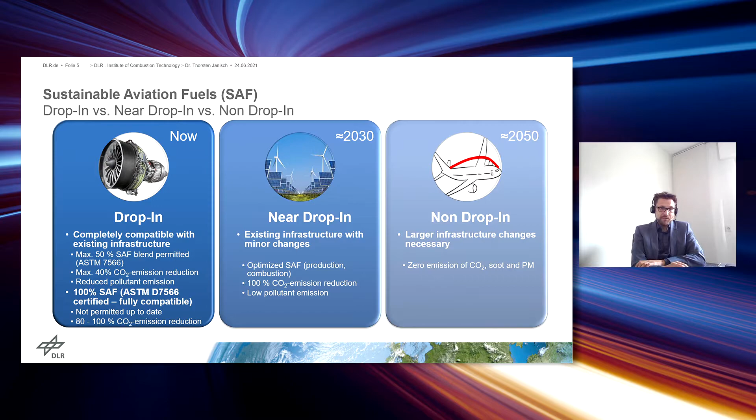Probably the fuel cell and electric aviation, due to the long development cycles, will make its way into this world only from 2050 onward. When it comes to the near drop-ins, we may expect them to set in at 2030, but we have no more than 7 years to go. We have to take action now, and that's why we become active. We actually develop drop-in fuels, and we do research on them.

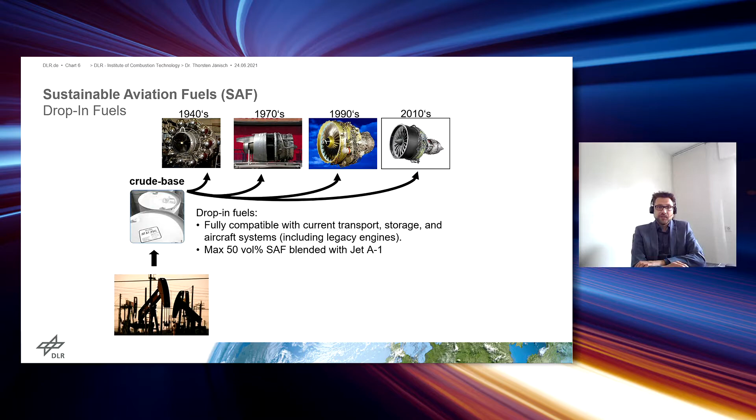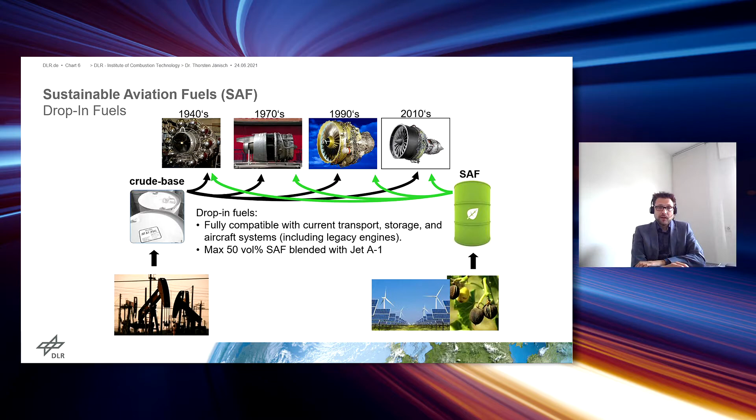Let me give you a quick example of what drop-in fuels are all about. You have an oil production point, you refine the oil, and you can fill it into every turbine or engine, no matter whether the aircraft is 10 or 20 years old, and the same thing is true for SAF fuels. You just change the source, biomass or green hydrogen, and you have sustainable aviation fuel, and you can actually refuel your aircraft as it is, giving you a direct and quick effect.

How do you get there? Well, it's not something that comes off the cuff. Fuels are very complex. They have to satisfy many requirements. They have to burn efficiently, and that's why we developed our in-house fuel design process, starting at the synthesis of the fuel, looking into the chemical composition, the physical and chemical properties, such as density, viscosity, etc. And the combustion is observed. We look into the mechanism, emissions, performance in the combustion chamber and in the engine.

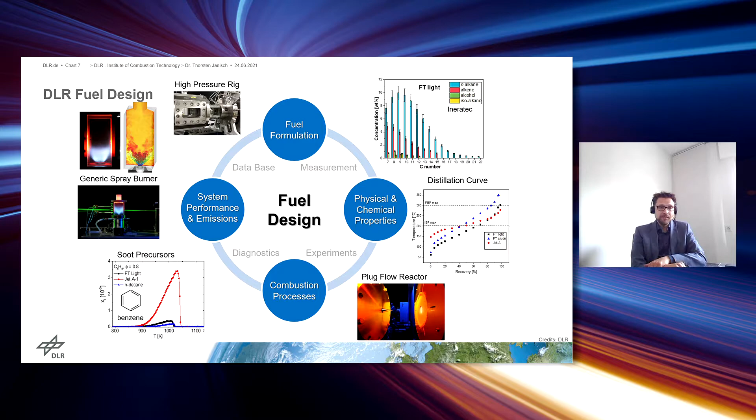And together with our partners, we work on optimizing the fuels under research. A demonstrator project and actually a model project is the so-called ND-MAX campaign, ECLIF 2. We tested various fuels, did emission testing both on the ground and in the air. You can see the second aircraft following the first one, measuring the condensation trails.

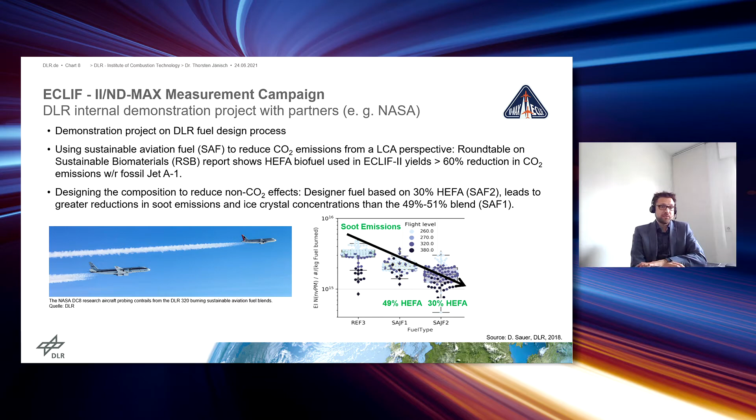If you use HEFA and add it to the reference fuel, it leads to a reduction of the soot emission. Interestingly, if you admix 30%, you get a better soot reduction than if you add 49% of HEFA. So we can attain a more than 60% reduction in carbon emissions. So sustainable drop-in aviation fuels take you quite a long way.

As I said, we looked into various fuels, including coal-based Fischer-Tropsch fuels, which are not much different from the other fuels later on. We have HEFA fuels, conventional fuels. We measured them during flight and on the ground measuring campaigns.

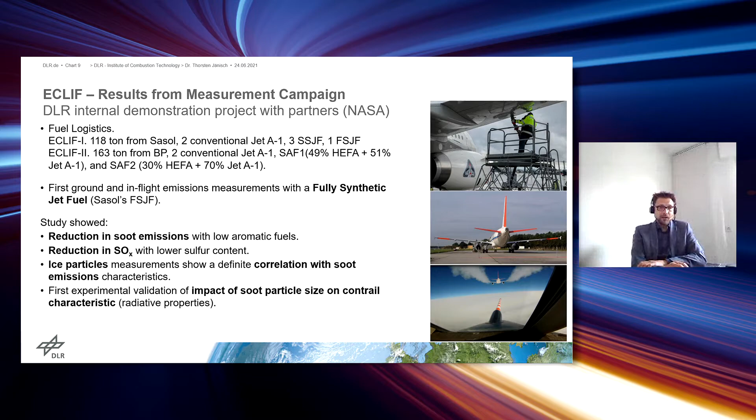You have less sulfur, less SOx in the emissions, and a direct correlation could be found between the soot emissions and ice particles, and this has an impact on cirrus cloud formation, and this actually contributes to global warming. And we said, okay, this is a great outcome. With sustainable aviation fuels, we can actually cover non-CO2 effects as well as carbon emissions.

Next, we have the fuel prescreening process. Approval is expensive and time-consuming, and if it fails, you have lost a lot of time and money. We don't have time to lose, and no one wants to spend money on nothing. So that's why we have opted for carrying out a pre-screening, looking into the fuel chemically and physically.

We actually set up a database, the SimFuel platform, that enables us to simulate the fuels, predicting the properties, carrying out combustion tests, and enabling us to make a forecast as to whether this fuel is eligible for meeting the requirements. And if need be, we will do some optimization work with our partners so the approval process can be passed successfully.

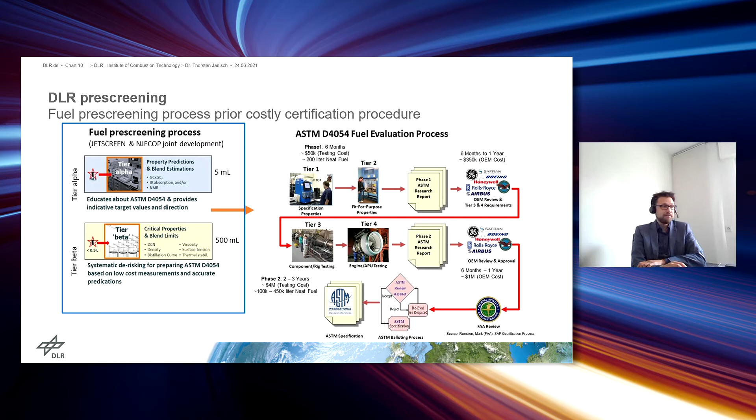What does it look like in real life? Well, let me talk about the P2X Kopernikus project. We work on this together with various project partners. We created an FT oil with alcohols and n-alkanes with only little isoalkane proportions. So this is not suitable for aviation engines. We said, okay, let's get rid of those alkenes and alcohol.

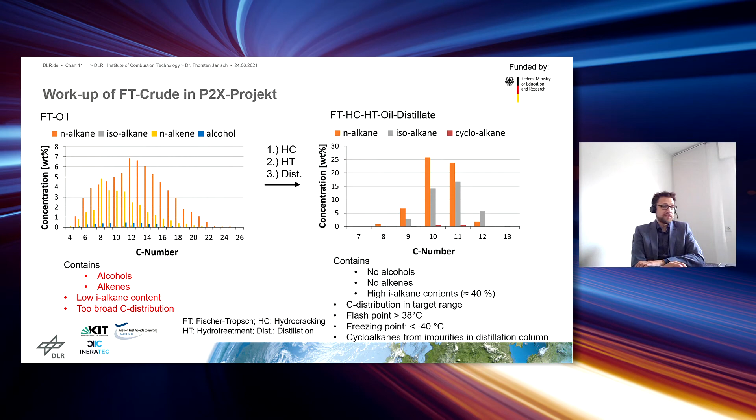We tried various processes such as hydrocracking, hydrotreatment, isomerization, etc., and we see a pure n-/isoalkane mix in the C range. This is the carbon distribution, and we have almost met all our targets. Most of the targets have been met, and some are still to be clarified, but we are nearing the approval of the first carbon-based fuel, CO2-free fuel.

So we want to include all those involved, all stakeholders, fuel producers, aircraft and engine performance, airports and consumers. We want to keep further optimizing the fuels in order to enable efficient combustion, economic production. CO2 and non-CO2 effects should be reduced as markedly and quickly as possible, and we want to ensure that the dream of 100% renewable fuel flights becomes a reality, and we love supporting the authorities and institutions defining the specifications for such fuel.

And that's the end of my presentation. I hope I've been able to explain to you that drop-in sustainable aviation fuels take you a long way to do a lot of good in the next 7 years in the way of reducing carbon emissions as well as non-CO2 effects, but a lot of testing and approval work is lying ahead of us. However, I'm quite confident and I am ready to take any questions you may have.